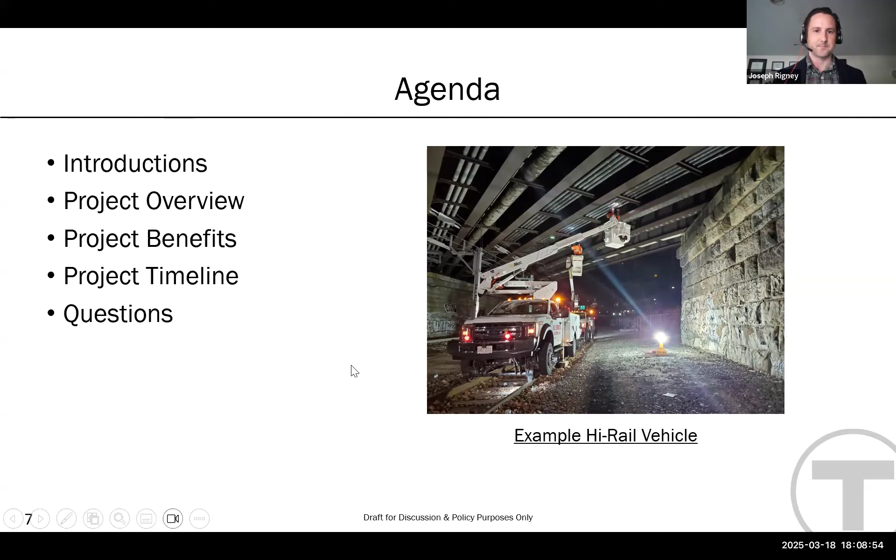So as I mentioned, the purpose of this project is to provide high rail vehicle access to the Red Line, particularly west of the Charles River.

One would be to shut down the Red Line completely, and you can access from that point and continue up north. The second would be to wait until the non-revenue hours of 1:30 a.m. and 4 a.m. and enter through that point, then traverse towards the north along winding roads, which can be dangerous with carrying equipment. So the solution to help with this maintenance is to put a proposed access tunnel near Alewife Station.

Again, shown at the top left is the geographical location. This area was selected because the Red Line starts to get very deep from that point until it makes its way into Boston.

So as we looked at the tunnel options, the geometrical constraints was one of the first things that we looked at. Next slide, please.

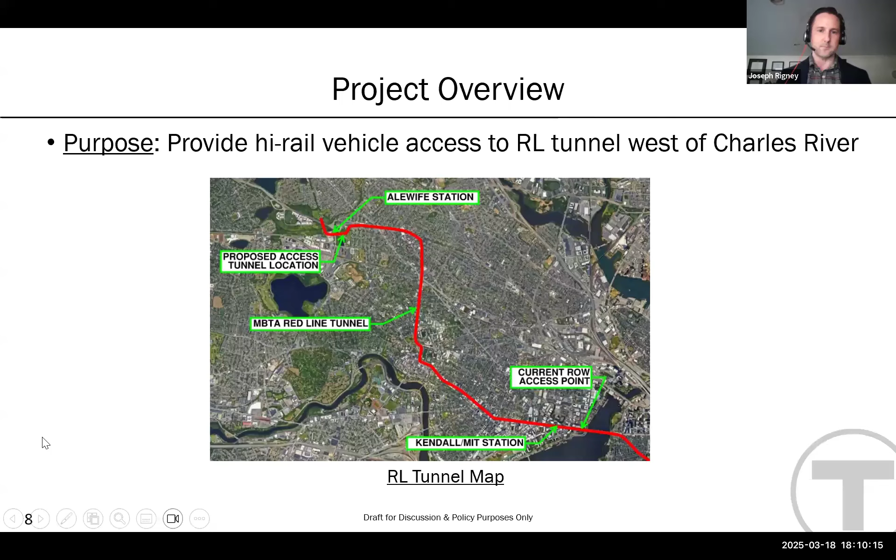So the constraints on the site obviously are the contaminated asbestos soil, and we also have the privately owned land with IQHQ, but the contaminated soil is really the big thing. If you go to the next slide, that's what we're hoping to answer with this.

Why this site? If there's contaminated soil, there are a couple different reasons. Next slide, please.

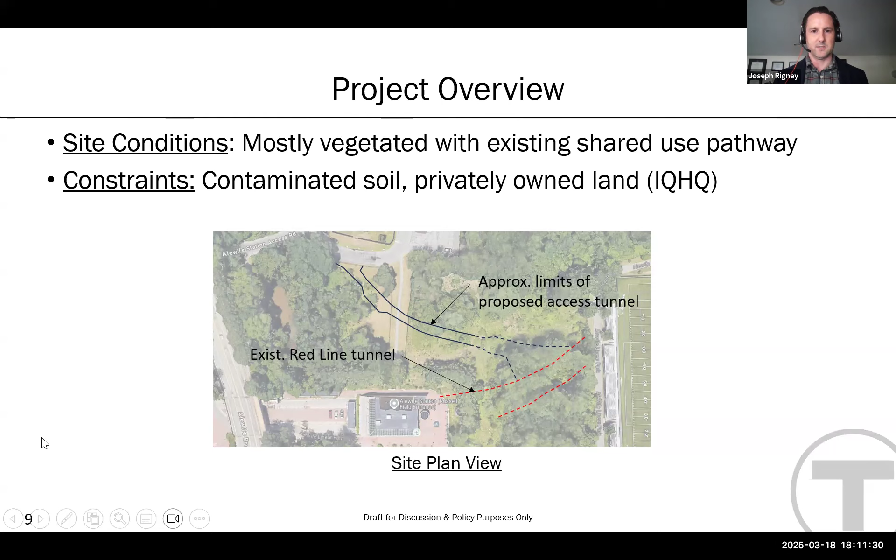We do have a team that brings a lot of experience with handling asbestos soils, and we do believe that this can be done safely and responsibly.

Some of the benefits we identified as we looked at this site: it's approximately 500 feet from the closest residential area, it has good proximity to the station, which offers construction benefits as well as operational benefits, and the site is relatively open, with no power lines or other obstructions of that nature.

We were able to achieve a short tunnel length with this site. Compared to other areas around here, this had relatively low traffic impacts, and there was no immediate obstructions with anything that IQHQ was doing with their developments.

And this is also the lowest construction and structural risk, where the methods that we're using to construct this tunnel are similar to those that were used to install the existing Red Line tunnel that we have today.

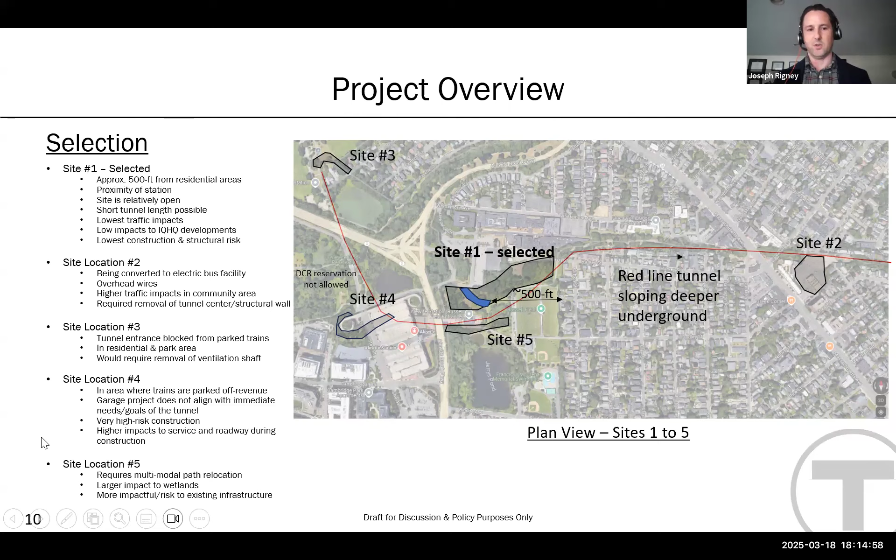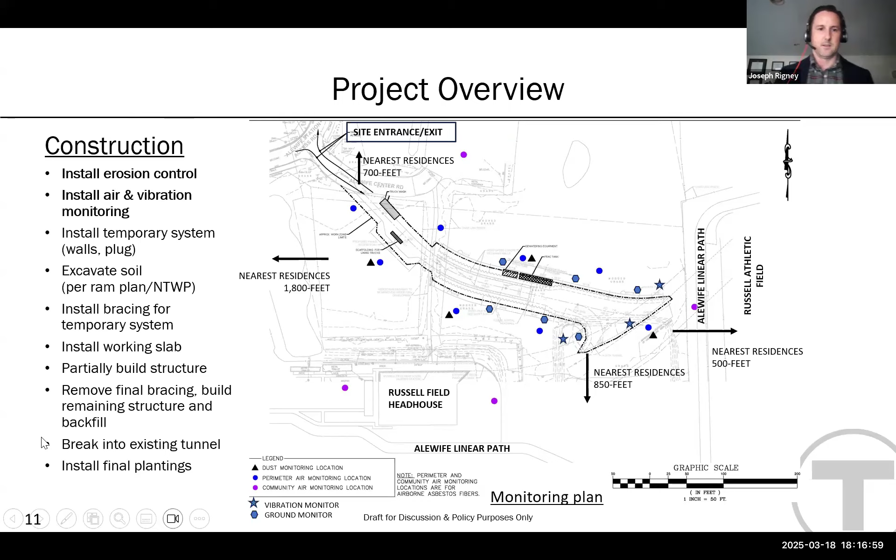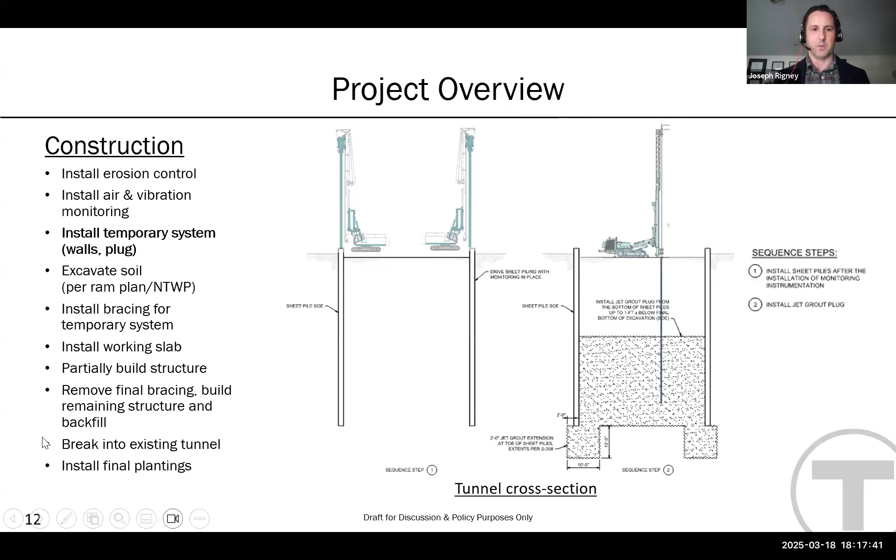So once the temporary system is in place, we'll begin soil excavation, which we understand is not as easy as it sounds, given the asbestos contamination. There is a process that we're following. I'll go over that timeline later on.

We are looking at a tent and vent option, which we understand the community would favor, but we are having experts review and provide input on if this is a more prudent approach. So again, we're following that process, and we'll go over the timeline later on. Next slide.

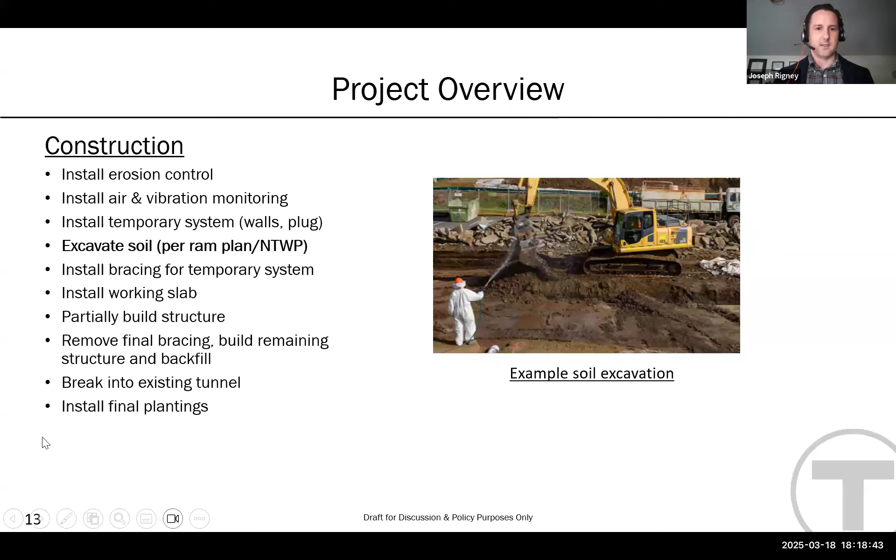So as we excavate the soil, we will continue to brace the walls until we get to the bottom of the excavation, and then we will build the structure from the bottom up and remove braces as we're installing the structure. This is what's referred to in the underground industry as cut and cover tunnel methods. Once this is installed, we will break into the tunnel and do the final plantings.

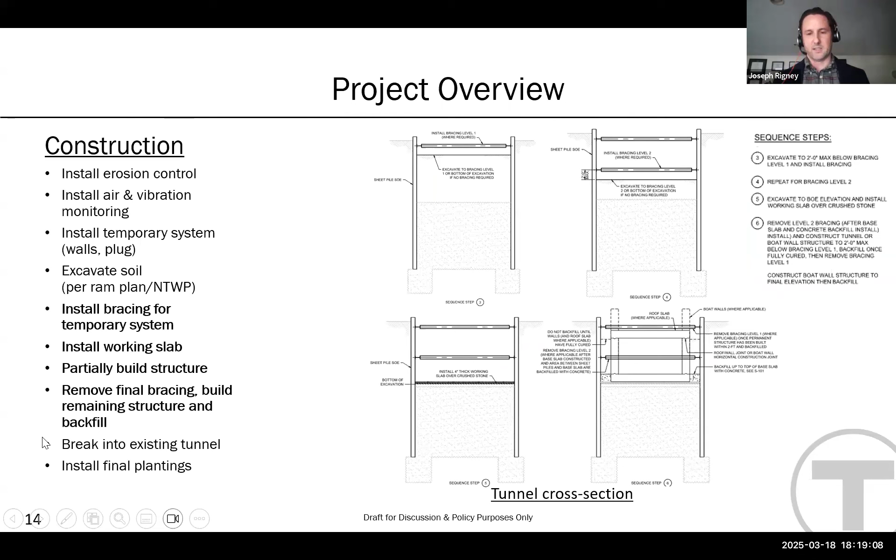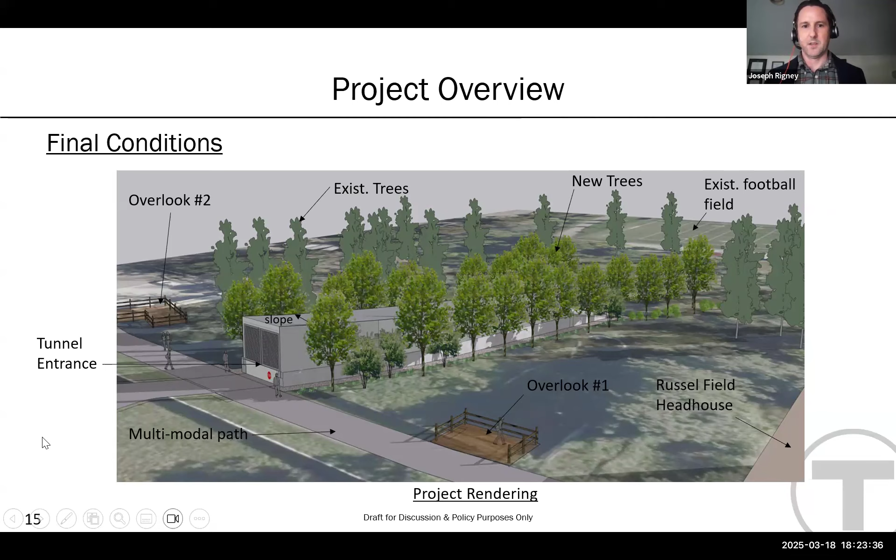So that's a lot to unpack. I know this is the first time people are seeing this rendering who haven't been part of the workshop, so we wanted to spend a lot of time taking a look at this here. Next slide, please.

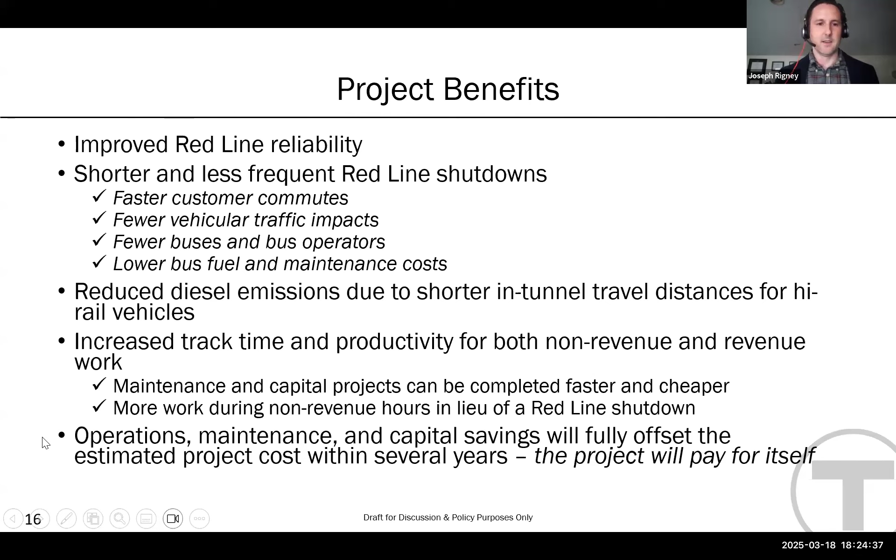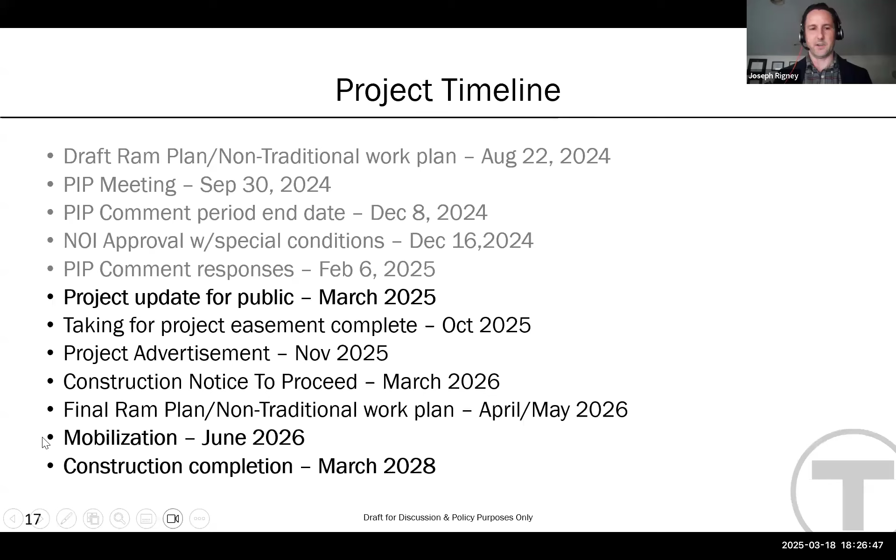So with that, I believe we're ready to open up to questions. If you go to the next slide.

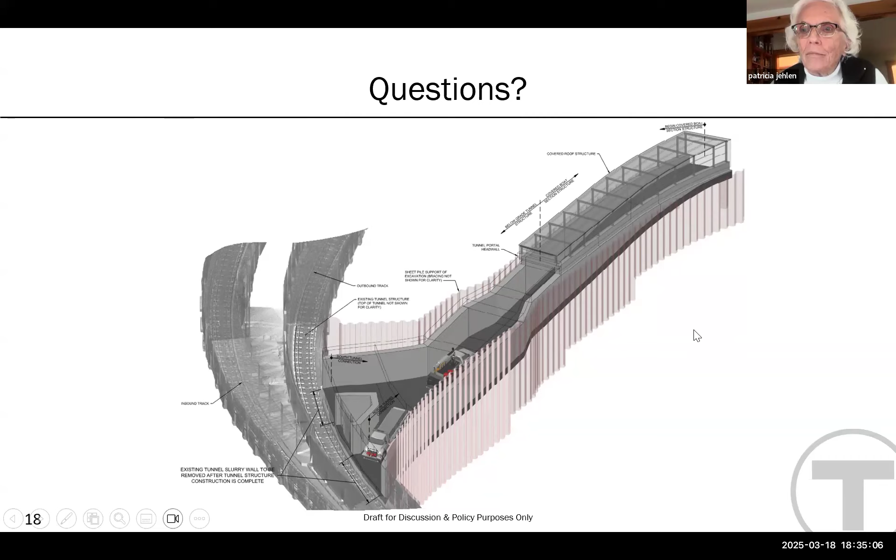Thank you, Senator. I want to highlight that in the interim we've had several conversations with the community and several working sessions with the abutters and members of the community, talking about things such as the planting plan. That's something we also want to revisit as we get closer to implementing the planting plan, which is a requirement as an order of conditions. I'm overstepping my project team a little, but either Ron or Joe, if you want to go over some of the conversations we've had with folks, and some we will continue to have with the community, I think that's a good opportunity to invite other folks who haven't been part of the process to roll up the sleeves and have a conversation with the T about this going forward.

Thank you, Adam. Yes, on the project's aspect we would continuously be working to develop the final planting plan and landscape plan. I don't know if you have any additional comments at this point, Monique, but we will continue engaging the community with those updates and betterments we have discussed in the past, and continue to see what we can do on our adjacent properties, above and beyond, outside of this project. Thank you, Ron. Thank you.

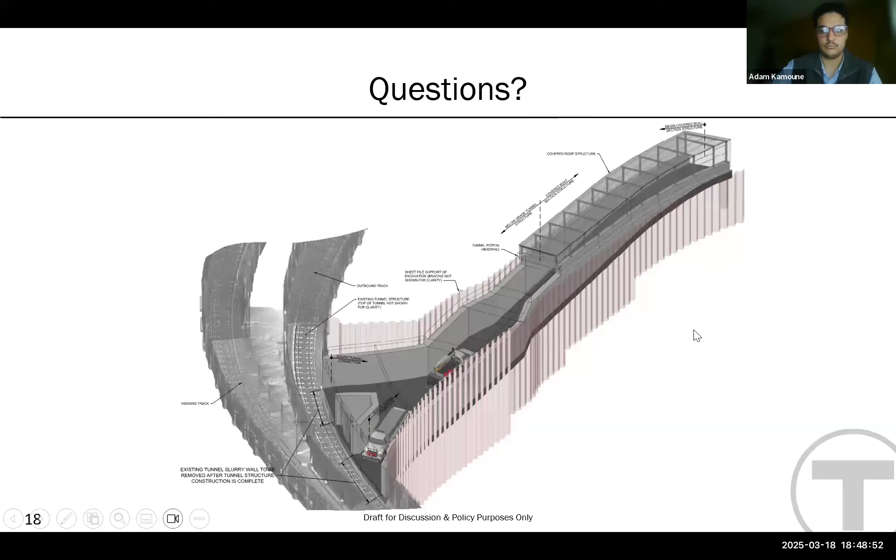Thank you. I believe I saw someone's hand. Yes, hi Jeb, I'm going to ask you to unmute. Yes, thank you very much. I live on Harvey Street, also abutting this site.

And our community has a dozen or more children, most of whom attend public schools in Cambridge and use that field, as well as many of the adults in this community. We are 100% opposed to using this site. The question has been raised a couple times, and we would like you to answer it: what would it take to get you to move the site? Because we are not prepared to have our children and our neighbors and friends exposed to asbestos.

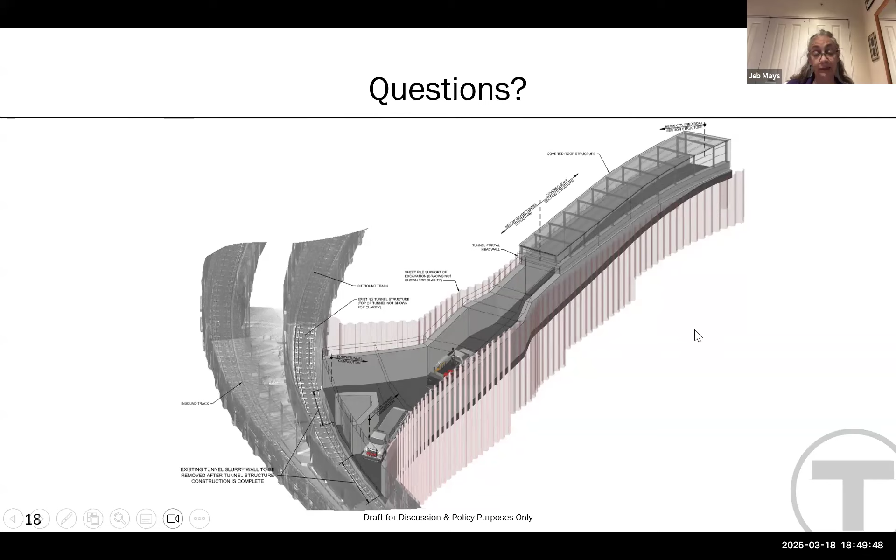Thank you, Jeb. I think the team is taking all the measures necessary and set out both by DEP in order to avoid that from happening. I'll turn to Joe and Ron to repeat that, and as we also consider the tent and vent and continue to evaluate that option and approach as well.

Yes, thank you, Adam. I will echo what was just said. We do feel that what we are proposing here at this location will provide the community with a safe result. We are continuing to evaluate the tenting and venting as a proposed means and method for the site activity. However, at this point in time, the RAM plan is showing non-traditional monitoring and misting. As we receive further information based on our evaluation data points, internal and external conversations, we will be updating the community with those additional results.

Thank you. And there is a question regarding having this location be in Arlington. Can we address that for folks on tonight?